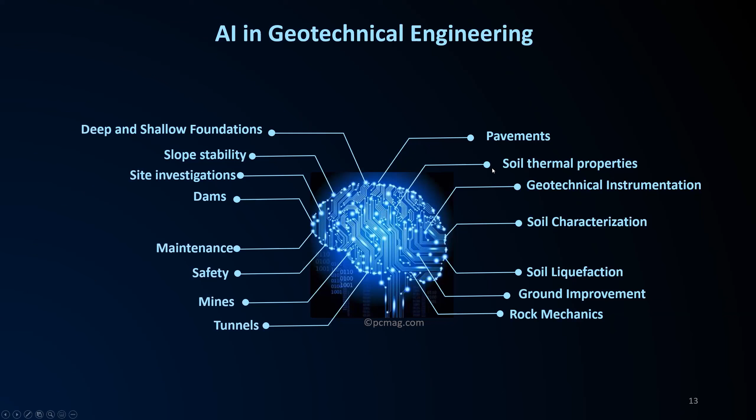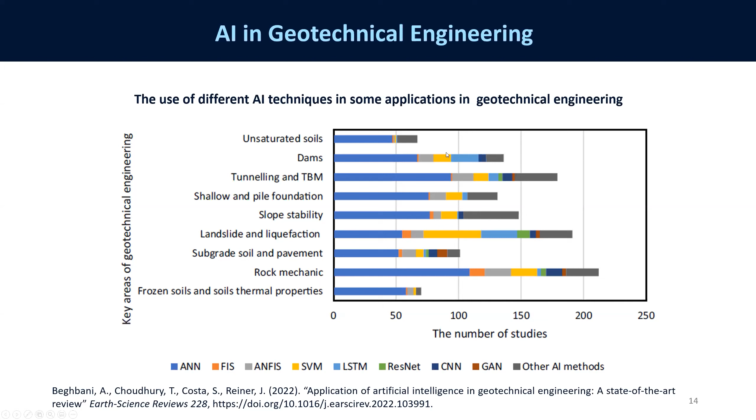For example, deep and shallow foundations, slope stability analysis, dams, maintenance, tunnels, pavements, soil liquefaction, many applications. And a recent study has shown that there are many studies done using AI in different areas of geotechnical engineering. And it's interesting to see that most of these studies use ANN, the artificial neural network technique, in order to develop the artificial intelligence models.

So AI is being used because it has lots of benefits, especially compared with other traditional methods. Some of the benefits of AI include the following. AI models can solve highly nonlinear complex engineering problems that sometimes traditional methods might fail to solve. In fact, as I mentioned previously, AI is a data-driven model. So it relies only on the data in order to determine the structure of a phenomenon without any assumptions about the physical behavior of that phenomenon.

And this is in contrast with other physically based methods that usually rely on physical laws in order to determine the underlying relationship of the different elements in a system. And usually they are done by lots of assumptions and simplifications of the physical problem, and they even require prior knowledge of the relationship between the different parameters. So this point is considered an advantage for AI in comparison with traditional methods.

Now, another benefit is that AI deals with multidimensional problems with any number of inputs and outputs, and it can be optimized to the most significant inputs. So for example, deciding the number of parameters to choose as inputs to the model can be done first by the expert who is developing the AI model, and also in an artificial intelligence model, we can study the importance of each input parameter. And based on that study, we can decide if an input is really participating in creating

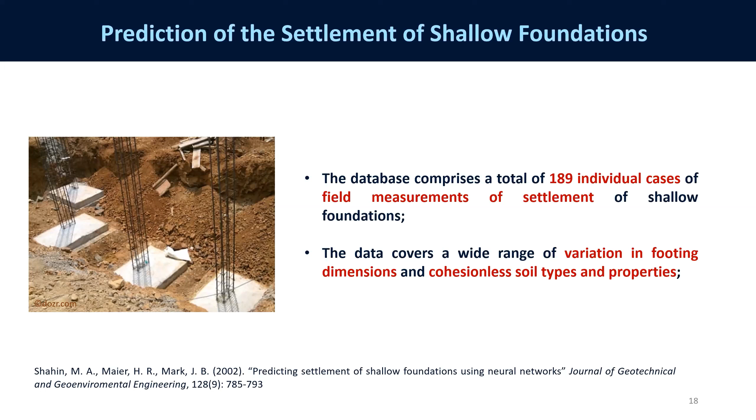So starting with the first application, it is about the prediction of the settlement of shallow foundations. In this study, they used a database which consists of a total of 189 individual cases of field measurements of settlement of shallow foundations. And the data covers a wide range of variation in footing dimensions and cohesionless soil types and properties.

And using this data set, they developed an artificial intelligence model based on the artificial neural network technique. As I mentioned previously, developing an AI model is an important and also a difficult step, as it requires knowing the number of hidden layers, number of nodes, and what inputs to include in the model. So in this study, after several trials and errors, they found that one hidden layer with two hidden nodes gave a good performance in the training of the model. And for the output layer, they used only one node, which is the measured settlement.

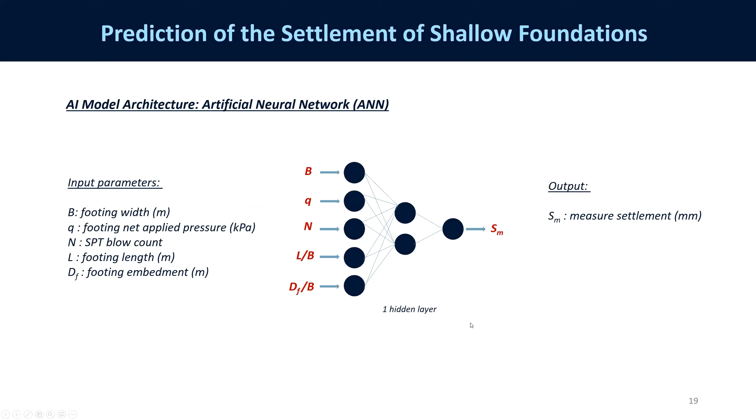And as input parameters, they used the footing width, the footing net applied pressure, SPT blow count, footing length and footing embedment. So using this AI model architecture, they were able to get the predicted value of settlement and to compare it with the measured ones.

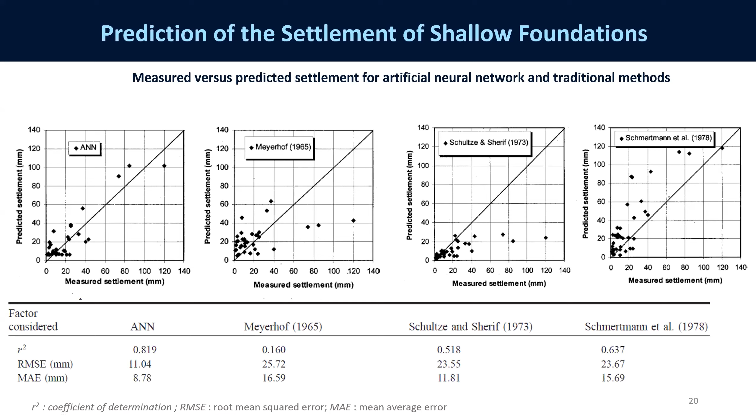And as can be seen from these figures, the ANN model was able to predict quite correctly all the measured settlements. However, the traditional methods predicted correctly small values of settlements in the range of 10, 20 millimeters, but for higher values of settlements, they either underestimate or overestimate the settlement value. So this is one application showing how powerful an ANN method can be compared to other methods.

Now, another application is about the prediction of the load settlement curve of driven piles. In this study, the researchers were interested in predicting the full load settlement curve, not only the bearing capacity or only the settlement. Because in fact, the design of piles in traditional methods relies on bearing capacity alone or settlement alone. So the prediction of the load and the settlement is done separately.

However, based on field observations, it is shown that the bearing capacity, or the soil resistance, and the settlement are two parameters that are influenced by each other. And so for the prediction of the pile's load settlement curve, it's important, in fact, to predict the full load settlement curve.

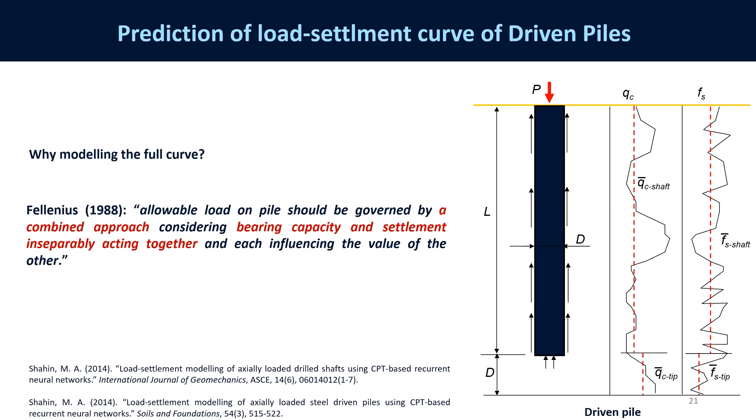So in this study, researchers got a database from the literature, and the database consisted of pile load tests and CPT tests, cone penetration tests. And these tests were done on sites with different soil properties and geotechnical conditions, ranging from cohesive clays to cohesionless sands, and also with layered soils.

So to develop the AI model, in this study, they used a recurrent neural network. It's somehow similar to ANN, and we will see later on the architecture. But in this method, what's interesting is that because we need to predict the full curve, predicting the full curve means that the current state of load and settlement will govern the next state of load and settlement. So to predict, for example, the load at the state i+1, this will depend on the value of the load at state i, and so on. Q(i+2) would depend on Q(i+1).

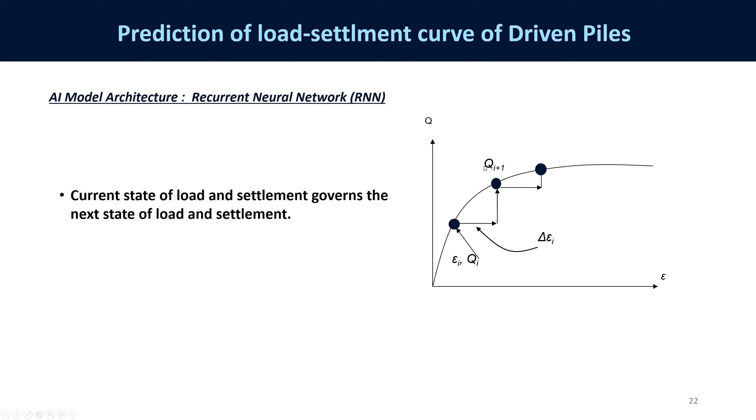So the architecture of a recurrent neural network is as follows. We see that the prediction of the load at the next loading state would depend on the pile load at the previous loading state. So to decide the architecture, again, several trials and errors were done in order to find the optimal architecture. And in this study, one hidden layer was used with 10 hidden nodes, and the output was only one value, which is the pile load.

And the inputs consisted of the pile geometry defined by the diameter of the pile and the pile embedment length. And for the soil properties, because we have a layered soil, in order to take this into consideration, in this study they used averaged values. So they used the weighted average cone point resistance over the pile tip failure zone, the weighted average friction over the pile tip failure zone, the weighted average cone point resistance over the pile embedment length, and the weighted average friction ratio over the pile embedment length.

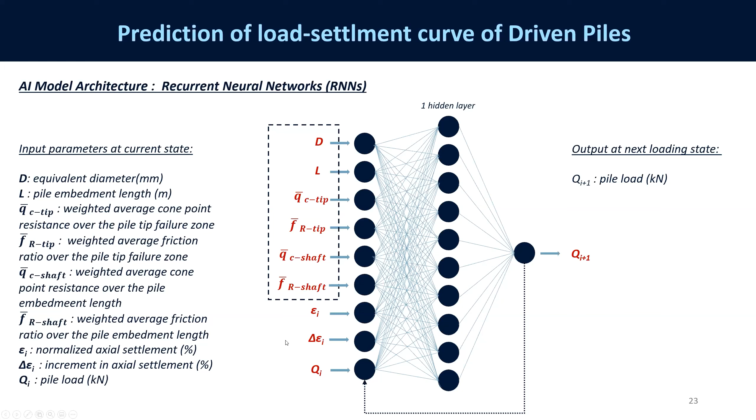Other parameters in the input consisted of these three current states, which correspond to the normalized axial settlement, the increment in the axial settlement, and as I mentioned previously, the pile load at the current state. In this study, for training the model they used a training data set which consists of 20 pile load tests. And for the model validation, they used 3 tests.

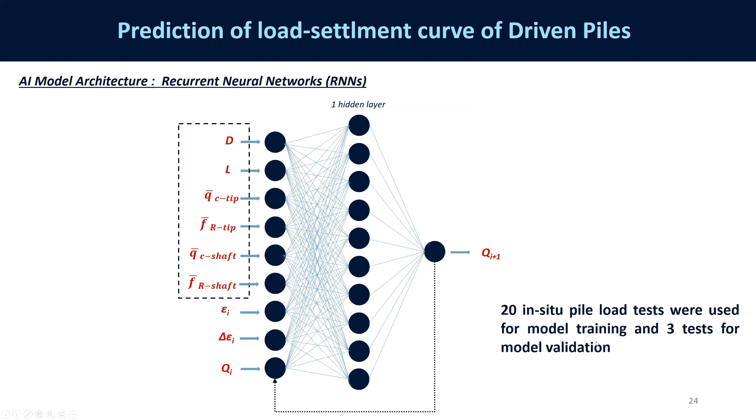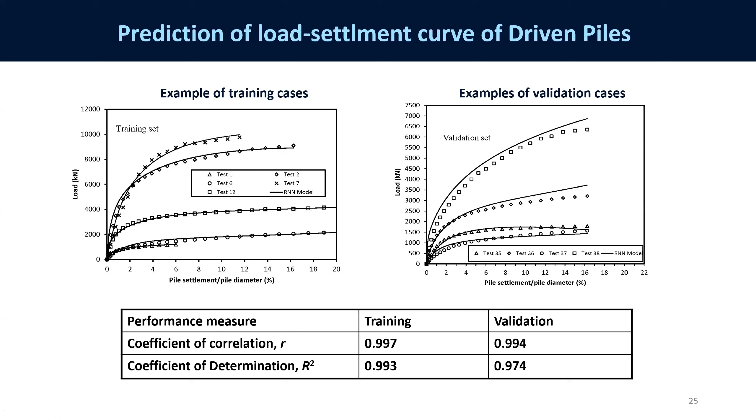And here are the results for the training data set and the validation data set. As can be seen, the model was able to capture correctly the experimental results. We can see that the model points fit quite perfectly the experimental data. And also we can see that the AI model succeeded in simulating the nonlinear behavior similar to the experimental results. And concerning the performance of the models, through the coefficient of correlation and the coefficient of determination, we can see that the performance of the model in training and in validation is quite good.

Now, in order to generalize the predictive ability of the model and to test the robustness of this model, a sensitivity analysis was done. In the sensitivity analysis, we try to fix all input parameters and only change one of the parameters, and try to see if the model will be able to capture the logical behavior based on our geotechnical knowledge. So for example, in this study, they tested the effect of pile diameter, pile length, and cone point resistance at pile tip and along pile length.

And they noticed that the model captured the relationship between the different parameters and the logical geotechnical behavior. So we can see that the bearing capacity increases with pile diameter, with the pile length, and with the cone point resistance at pile tip and along pile length. So this gives more confidence in using this AI model.

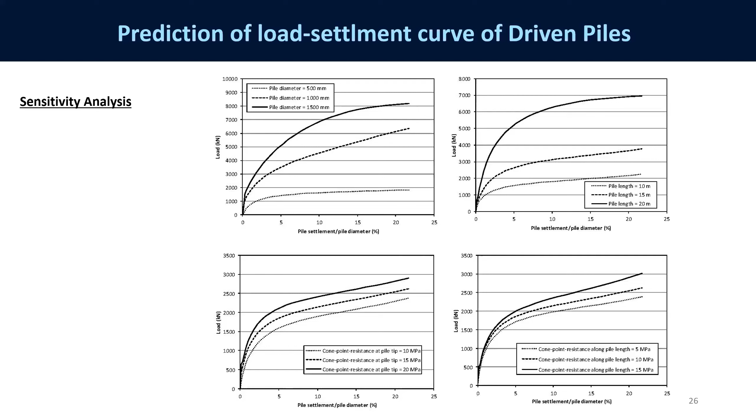So how can engineers use this AI model? In order to facilitate the usage of this model, we were able to develop an executable program that can be used by any interested researcher or engineer upon request. So whoever wants to use this simple application can just ask us and we can give them this application.

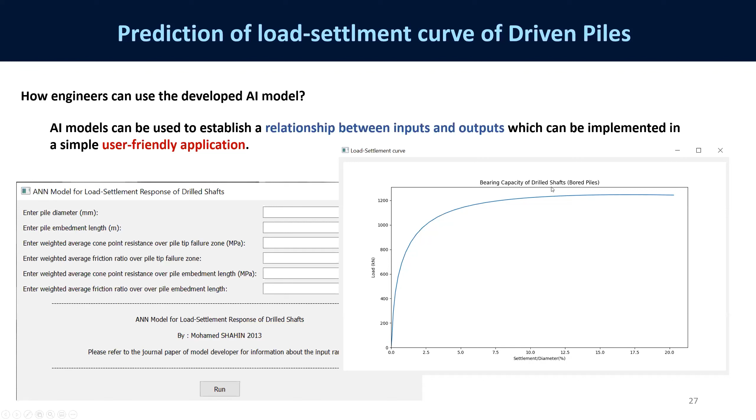In fact, an AI model helps us to establish an equation or a relationship between inputs and outputs. So we can use this relationship and implement it in a simple user-friendly application as we did here. So what we can do then is just provide this application with the input parameters and we'll get the predicted load settlement curve.

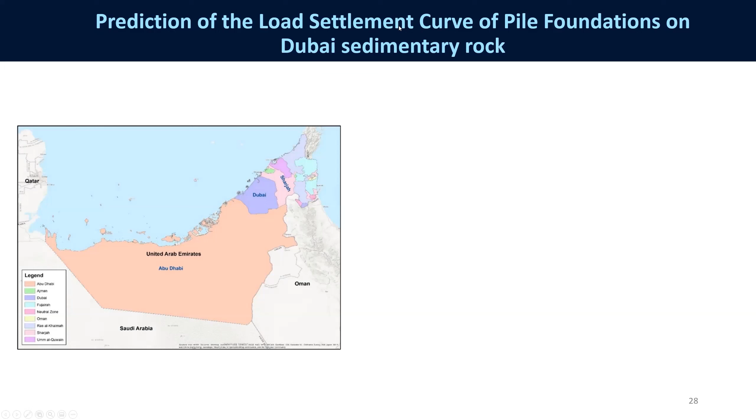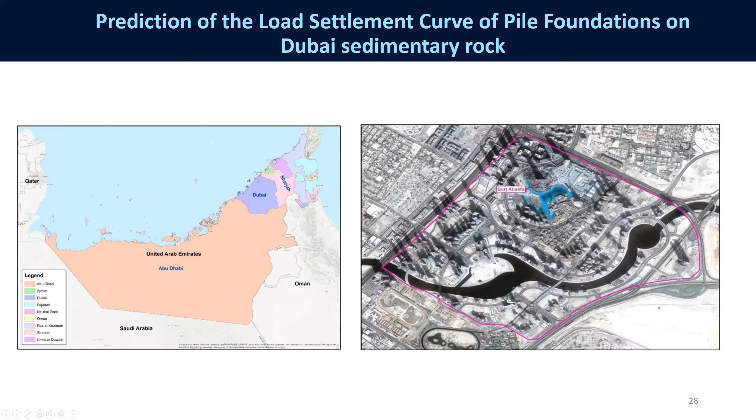Similarly to this study, another study is still ongoing. The objective of this study is to predict the load settlement curve of pile foundations on Dubai sedimentary rock. We are mainly interested in the Business Bay and downtown Dubai areas. And in this area, we already have a good data set, which consists of 116 static load tests collected from more than 45 towers in the Business Bay and downtown Dubai areas.

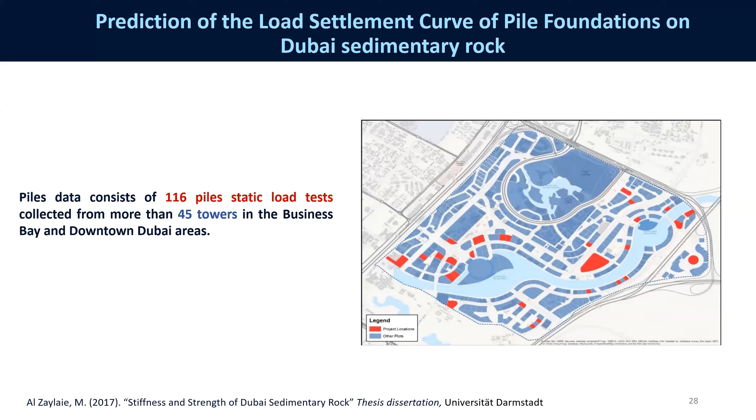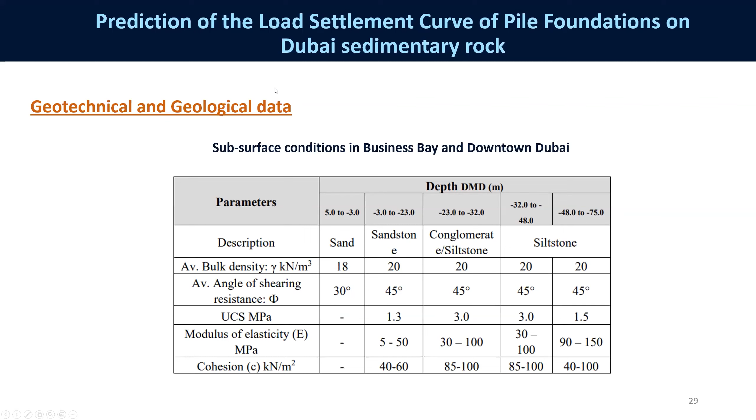So why we are interested in this study, and also we have lots of geotechnical and geological data. So we're interested in this study because based on previous research, it was found that conventional methods used to design pile foundations might lead to additional over-design of the pile dimensions. And this can result in additional material and labor and therefore increased costs.

So in this project, we will develop an artificial intelligence model in order to predict the load settlement curve of piles and compare them with other conventional methods. Our objective would be to help engineers optimize the design and the analysis of the piles in Dubai sedimentary rock and therefore participate in green construction.

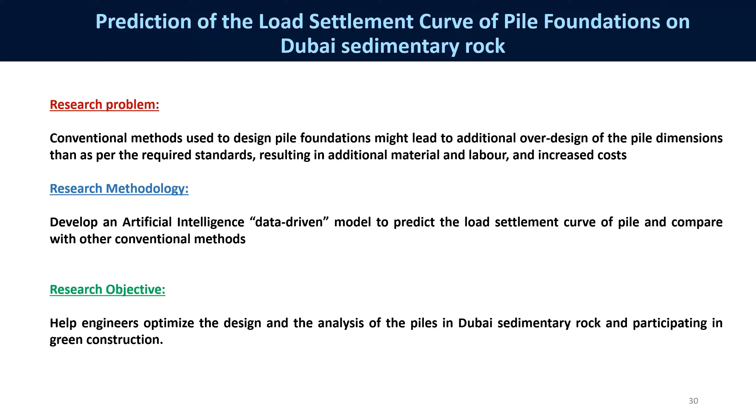Now, this model will not only be used for Dubai sedimentary rock, but it can also be used for other areas with similar geological and geotechnical conditions. The project is still ongoing, so I won't be able to share with you any results, maybe or hopefully in future presentations.

Now, another application is related to the prediction of the mechanical behavior of railway ballast. In fact, ballast is among the most used materials in railway tracks. And we already know that ballast is subjected to high levels of stresses due to the heavy loads of trains. And so it is important to be able to predict accurately the mechanical behavior of the ballast once subjected to static and dynamic loadings.

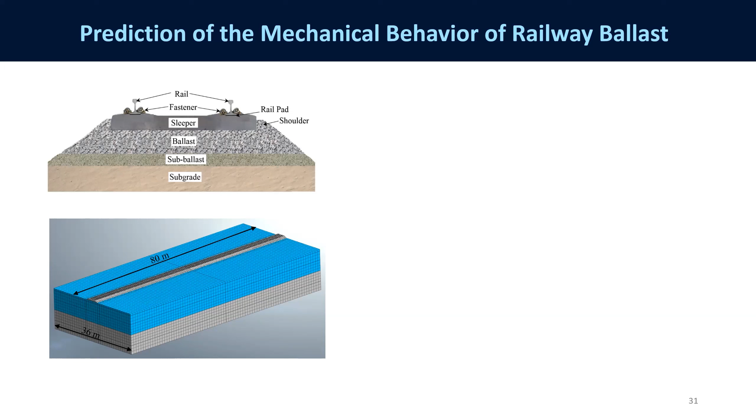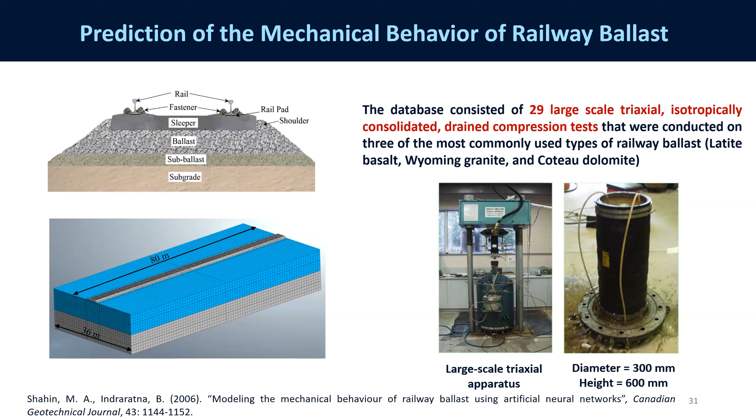So in this study, an artificial intelligence model was developed, and it is based on a database consisting of 29 large-scale triaxial isotropically consolidated drained compression tests that were conducted on 3 of the most commonly used types of railway ballast. And in this study also, they did finite element modeling using Plaxis, using one of the hardening models. So these results are used for comparison later on with the predictive ability of the AI model.

So for the AI model, they also used recurrent neural networks. So this is the general architecture of the AI model used. They used one hidden layer with 10 hidden nodes. And in this AI model, two outputs were predicted: the deviator stress and the volumetric strain, because they needed to predict two curves: the deviator stress versus the axial strain and the volumetric strain versus the axial strain.

And the input parameters consisted of different parameters, some parameters that correspond to the grain characteristics, such as the D50, the diameter at which 50% of the specimen passes through the sieve, CU, which is the coefficient of uniformity, coefficient of curvature, CC, and also other physical parameters such as void ratio, bulk unit weight, and stress state parameters such as the confining pressure. And the current state parameters also they used.

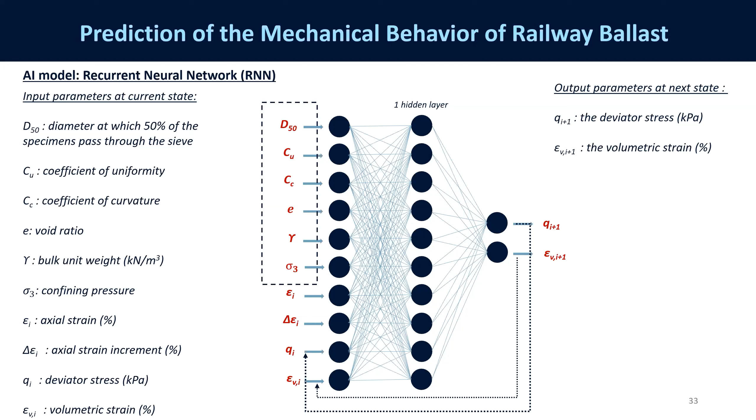So using this AI model, they were able to predict the deviator stress curve versus axial strain and the volumetric strain versus the axial strain. As can be seen in these figures, the AI model succeeded in predicting the experimental data, and compared with the FEM results, you can see that the AI model gives even better results, especially since in the FEM model it was a hardening constitutive model. So the post-peak softening wasn't very well or perfectly captured.

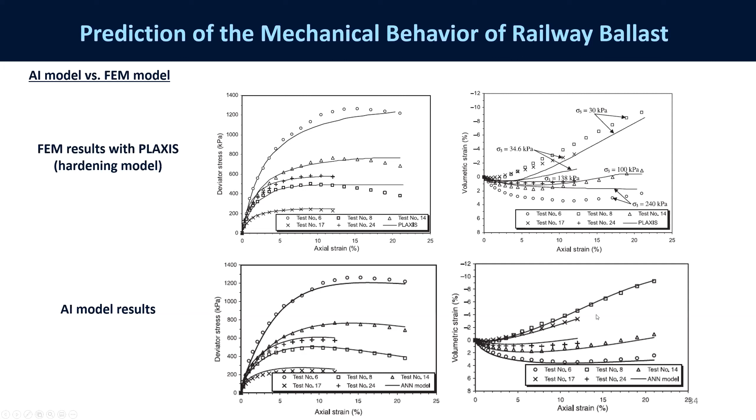In the AI model, we can see that the hardening and the post-peak softening were well captured. And even the contractancy and the dilatancy were well simulated. And also the effect of the confining pressure was well captured by the AI model.

Now, what about the future of AI in geotechnical engineering? In fact, with the concept of artificial intelligence and putting data into action, nowadays there are noticeable efforts to investigate the digital transformation of the geotechnical engineering field. So the future of AI, I can say it's all about the digital twin. And according to one of the presentations given by Professor Mark Girolami, the next phase of the AI revolution would be through digital twins. So let's define what digital twins are.

A digital twin is a virtual replica of a real geotechnical structure or any real structure. And it serves as a digital counterpart for purposes such as testing, live monitoring, maintenance, and others. And so a digital twin can be used in real time, and it can be synchronized with corresponding physical systems. Let's see some examples of the applications of digital twins.

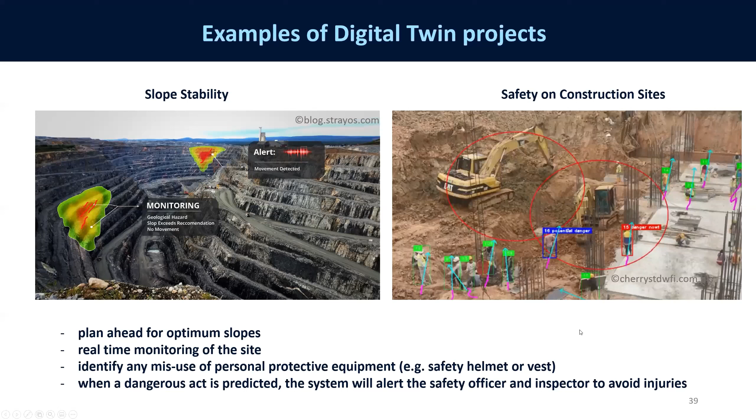Another important application of digital twin is in the field of safety on construction sites. For example, digital twins in parallel with artificial intelligence can help us identify any misuse of personal protective equipment, such as safety helmets or vests, so that we can immediately intervene to protect workers on site.

So there are lots of benefits of digital twins in geotechnical engineering. Among these benefits is the real-time monitoring of the geotechnical structure. Other benefits can be allowing efficient consumption of resources, allowing testing what-if scenarios, including, for example, the impact of design changes or any events that can occur. And also, digital twins can allow for efficient management and improve productivity and safety.

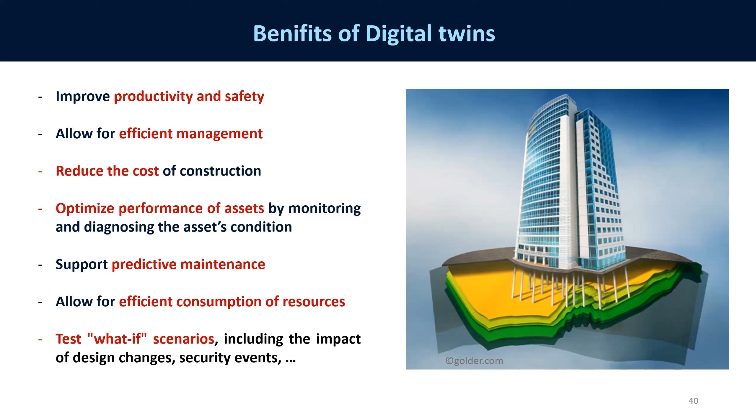Now, besides all these benefits or advantages, there are also some challenges that we might face in digital twin projects. For example, it is essential to remain aware of the quality of the data. In fact, a model is only as good as the data that created it. So it's very important to have good quality data, to have a model that can be really useful for us, the geotechnical engineers. And the twin model is only useful as long as it remains updated by integrating new data as conditions change. If new real-world information isn't fed back into the digital twin, it might become misleading.

And so finally, I'd say in today's world, which is a rapidly changing world, it's time for geologists, for engineers, for structural designers to get to know digital twins. For it offers many exciting and new possibilities for safer and even more efficient design and better understanding of risks and uncertainties. In other words, it brings worlds of information together.